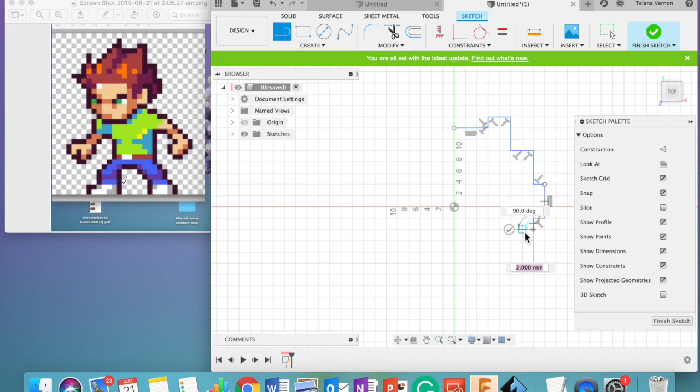Again, if I stuff up at any point, when I go back to my line tool, I've just reopened it, go back to my line tool, and now it's connected to the middle. All I want to do now is undo, because if I don't have something I like, I'm always going to press undo, just like in Word. Then continue going around the outline.

If I accidentally stuff up again, or go up on a corner instead of going straight across like I'm doing now, I've accidentally done like a little mini curve. Just go straight back, press escape, lose the selection tool, and then just go backwards - undo, undo, undo. Click on the line tool again and make sure that you click on that dot and continue on with that, until you get the complete outline.

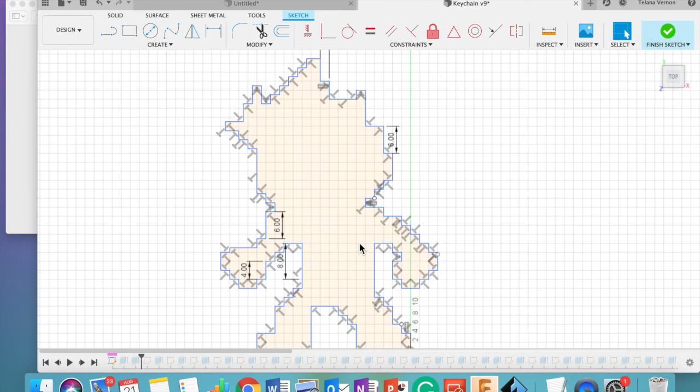Okay, so now we have the full outline on screen. So when you know it's done is when it has all connected and you have this little pastel. I'm going to finish sketch in the right hand corner, click on the middle, press create, then go to extrude, click on it, it'll turn blue.

If it hasn't, then click on it again, and I'm going to increase it up, so make it 10 millimeters up. You know when it's worked when you press the little cube up the top and you can go to the home screen and you can see it enlarge.

So once we have our three-dimensional character, this is the completed one. We're going to add all these extra features, as you can see, which is what I'm pointing to - all these extra little features on top we're going to add. So I've already done this.

I'm going to flip back so you can see this little timeline across the bottom, and you can see how I made absolutely everything along my little keychain. I keep flipping back - along here you can see all the little sketches, all the little pulls I've done, and you can even edit features, which is what I'm showing you right now.

We keep flicking back, you can drag the whole thing across. I'm just showing you all the little parts I've done - I've done a lot of work in this. I've had students who've only done 2 or 3 and it looks perfect as well.

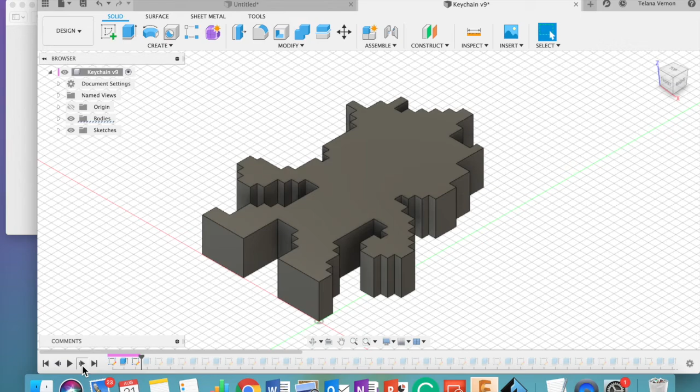But if you want to get a good grade, you need to make sure that you do a lot of detail. So I'm going to show you how to do the little mouth so you can see it up and on. The first thing you need to do is press the top.

We're going to create a sketch. We're going to click on the actual main thing we're clicking on, so we need to make sure that we're on the right level, and we're going to draw a line just like we would when we did the other bit. Now we're working on the top of this.

You know when you've got it completed, so when you press finish sketch and you go to extrude again, you click on it, you raise it up to about 3 millimeters. You can have anywhere between 0 and 5.

I'm going to do 2, and as you can see my little mouth - 1 would have looked good too. You can even do half as well, and you can see his mouth is extruded. If I want to work on top of this little piece and add another layer, I need to make sure I click on the actual mouth, so it's actually highlighted - see, the blue is where I'm working on. So I want to work on the mouth.

So I'm going to click on the blue, and press the line tool, and draw on top of the mouth. If I don't do this, I'm going to have this whole middle area happening. So make sure that you click and it's blue, or the area that you want to work in.

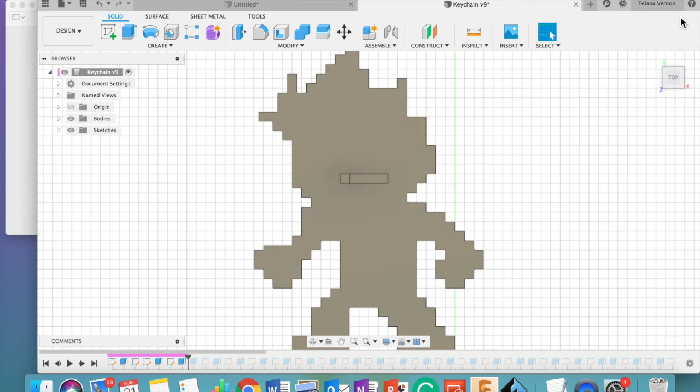So I'm going to extrude just a little, like a tooth, and put like 1 or 2 or 3. All right, and now you can see along the edge it looks completely ridiculous. So then I would go back and modify it.

All right, so create sketch, and now I'm going to show you one more thing. You do this for the whole thing. I'm going to show you how to do 2 sketches at a time.

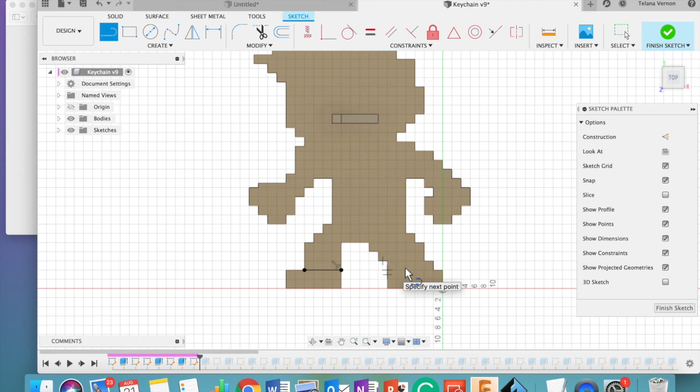So if you end up doing 2, you want to do 1 at a time. But if you have things that are all at the same level, so say I'm going to increase the feet here, the little shoes, to 1. So all I'm doing is drawing a line to make a little component for it.

I'm going to press finish sketch, then go back to extrude, or you can press pull. I'm going to press the shift button on my computer and hold it down while I press all the areas that I want to enlarge. And as you can see, I did 2 at the same time.

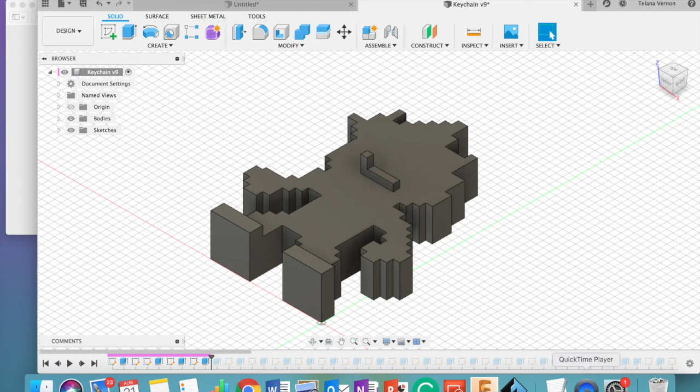All right, and once I've done that, I'll do the rest of it, and increase until I finish with a complete product that you can see right here. You can see all the different layers I've done, all complete. I'm going to use my orbit tool, and now you can see I've got these little lines in the side of it, and what happens there is that they won't print properly.

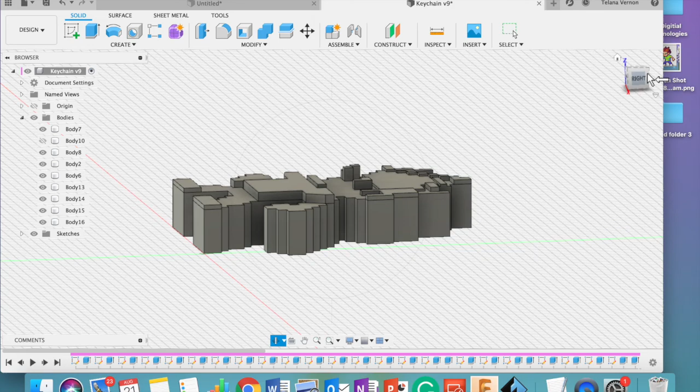So we need to go into the bodies and have a look. I have, oh god, 16 bodies here, so I need to make sure that there isn't. So the easiest way to do that is to extrude it down and then extrude it back up again.

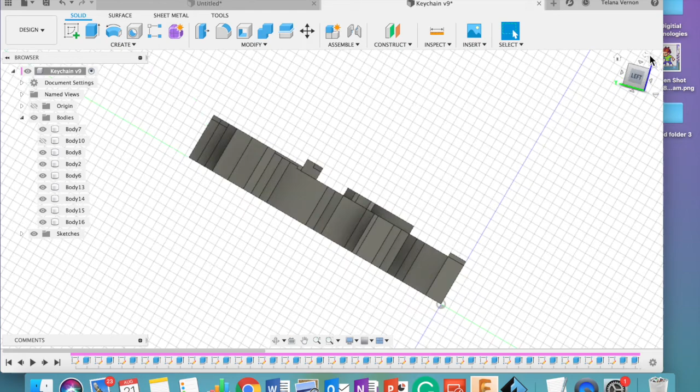As you can see, there's plenty of these little lines that I need to get rid of. So I'm going to press select, and click on the area that I wanted to extrude down. As you can see, there's even more lines.

All right, I'm going to work on his little ear. Going to press the press pull or extrude, and extrude it down by about 2 millimeters, so minus. I'm going to push it back down into the body, then extrude it back up again. So I push it down by 2 millimeters, and extrude it by either 2 or 3 up, depending on what I want.

And as you can see, there's no more lines. So you need to do that for all those extra bodies. All right, you can also press the shift button and hold down certain sections of that one body and make sure that it is connected to the full body.

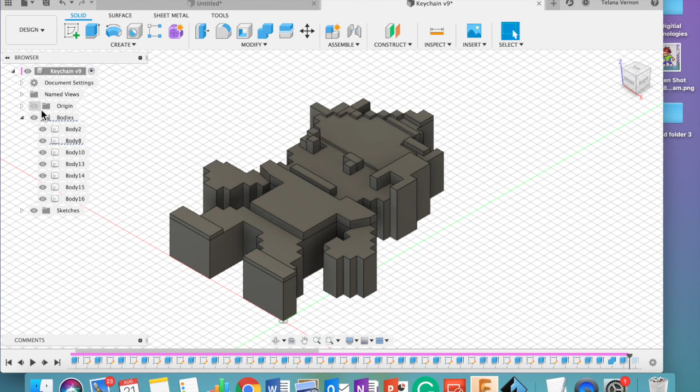Okay, so the last thing we have to do is print. So what we needed to do was click on file, print, as 3D print. We're going to click on the selection, make sure you select all of him. All right, so there should only be one body now, so we see all of him is selected. He's all going to print pretty well.

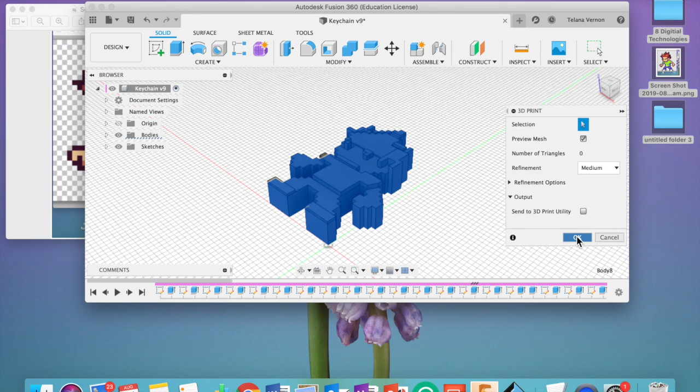We're going to unselect the send to 3D printer, and press OK. And this is going to save as an STL file, as you can see, so give it your name. Save it onto your desktop, and then hand it into the teacher.

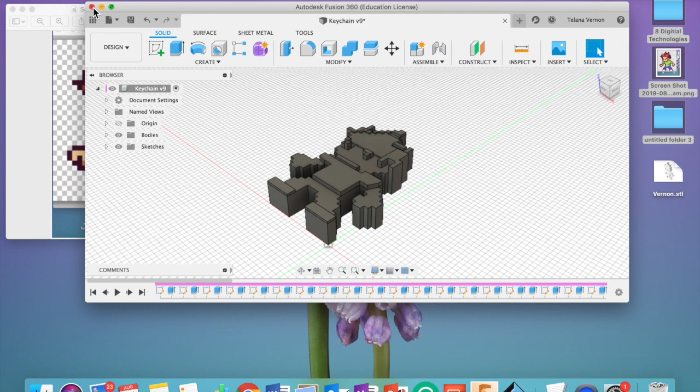Okay, so again, it's file, print as 3D print. Unselect the printer, select him to make sure he's completely covered, then file, and then save. Press OK, and that's it. You're done. Make sure you save any changes, and you'll get your print.